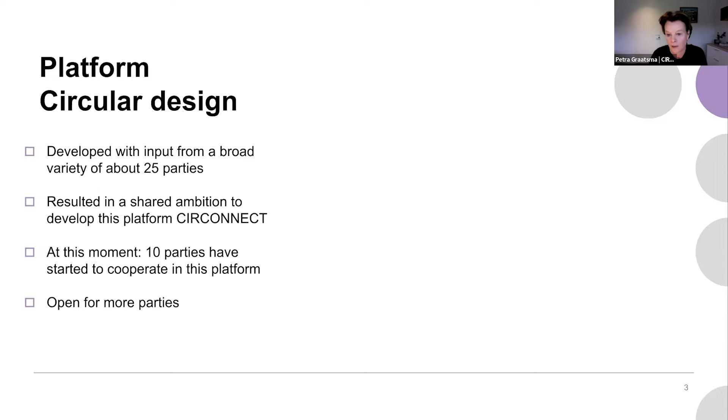What's the ambition of this platform? It's a network of collaborating parties who do everything to collect, contribute, enrich, and distribute their knowledge of circular design, so that companies and designers can apply this knowledge, and that other parties are fed with insights which they can translate into improved system conditions, because this will accelerate the transition to the circular economy.

About today's session - this is exactly an activity that we want to organize from this platform, where 3 different elements come together: the knowledge, the network, and what we call applying. This means you can put it into practice, or it prompts action on the knowledge that is shared.

This brings me to the subject of today. We have chosen a very specific and relevant design topic: the ease of disassembly. We see recently more and more interest and attention for this subject, because of upcoming regulation, customer requests - for example the repair cafes - and circular ambitions of companies.

What's the program of today? We will start the session with Bas Flipsen from TU Delft. He's an expert in this field and will show 2 different tools to assess this ease of disassembly. Maybe you even recognize him later on, because he was on Dutch television last week in Nieuwsuur about repairability.

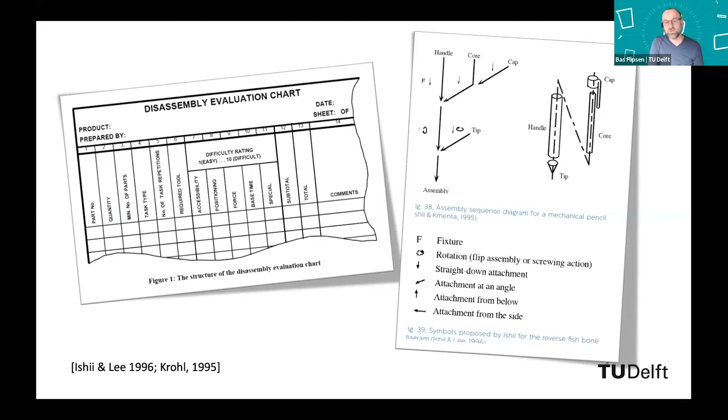But recently, this work has come under renewed scrutiny because of the Green Deal and the commitment of the EU Commission promoting circular economy. Recent material efficiency standards like the EN 4555X series focus on general methods to assess products on all technical loops of the circular economy. The latest addition to this standard is the EN 45554 standard, which promotes a general method for assessing the ability to repair, reuse and upgrade energy-related products. It finalizes the series of standards, and it's a good thing, I think.

In this standard, the identification and ranking of so-called priority parts is the first step in assessing a product on its repair, reuse and upgrade. A priority part is determined by the likelihood for replacement or upgrade, second the suitability of the part for reuse, and the functionality of the part. The standard touches on the most inner loops of the circular economy scheme.

On the other hand, we have the EN 45555 standard, which promotes recovering materials for recycling purposes and focuses on recyclability and recoverability rate and the efficiency of recycling and recovery processes. It thus touches upon the most outer loop of the circular economy scheme. However, both the EN 45554 and the 45555 do not consider the environmental benefits of avoiding the production of equivalent amounts of primary materials and energy carriers, nor the impacts associated with the end-of-life treatment processes.

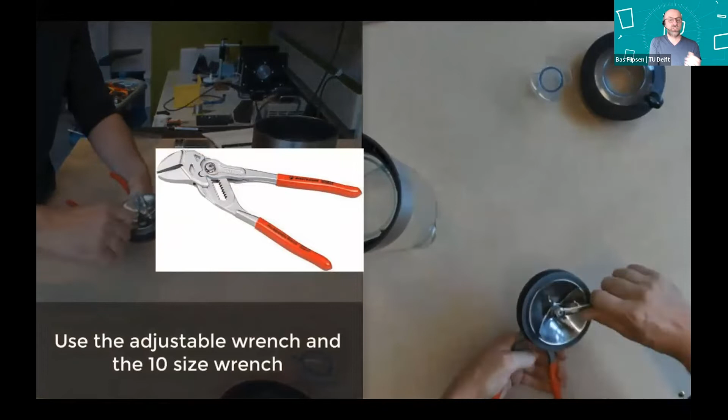The assessment of the product focuses on product-related aspects. Over here you see my blender, which I disassembled completely, and I recorded it on a video.

Not on context-related aspects, such as the availability of spare parts or health and safety risks - we don't focus on that. That's for other concerns like the new EU regulations on repairability and the new repairability scoring, which will come up in this or next years. Or the French repairability index, which also focuses on, for instance, the availability of spare parts and manuals, availability of service manuals or maintenance manuals.

We only focus on the ease of disassembly. So the method consists of 3 steps.

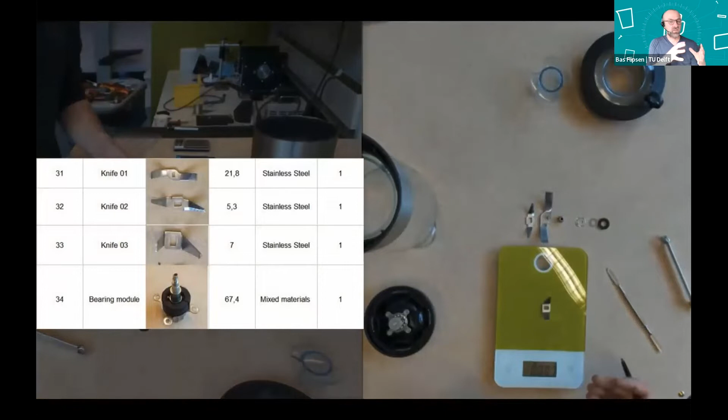Recording of the teardown operation in a spreadsheet - so actually fill in every step you take by disconnecting. You disconnect every part from the assembly and fill out the spreadsheet with a large amount of information, followed by the hotspot identification based on the previously defined indicators.

The third step consists of locating the hotspots in the product architecture by making a disassembly sketch or a disassembly map, and figuring out how deep critical parts are nested in the product and what hurdles have to be overcome to reach them. The last step is not discussed in this presentation.

While disassembling the product, the operator logs the necessary data consisting of 5 properties: the general properties, describing all activities, tools, and actual time involved; the difficulty of access, consisting of the force involved and difficulty of positioning the tool; descriptions of the activities, and of course the general properties - the parts or assembly name.

So that's really important - you have to name the different parts. The fourth group consists of functional sensitivity properties and concerns the failure rate, the amount of maintenance, and the prioritization of the functionality. This is quite difficult to get, but this is the research you need to do if you want to do this assessment.

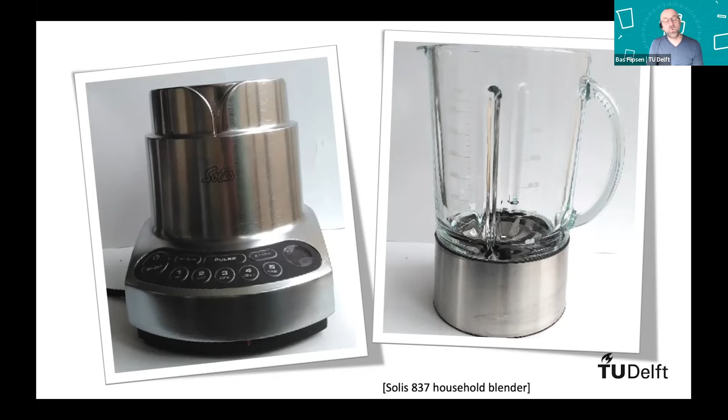The product consists of 39 parts, for which 55 disassembly operations were needed, and 6 different tools were needed in 12 operations. So that's quite a lot.

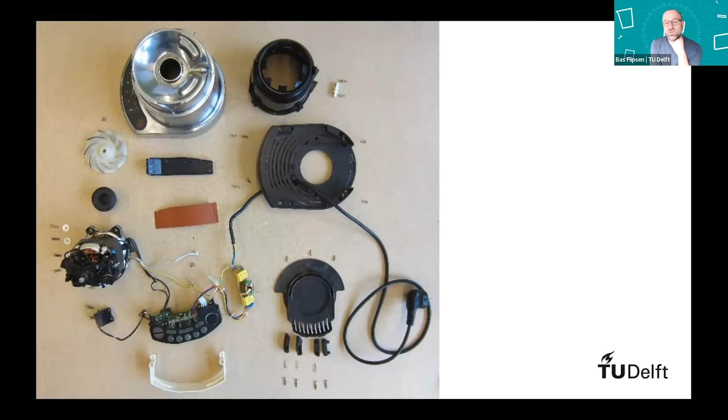High repairable products often have a low amount of tools, or maybe no tools, just your bare hands. In all other operations, the hands were used, and the time required for disassembling was critical for more than one part. So let's see what we have over here.

Especially step 11 and 13 took a while to disconnect, and this is the bearing module, which you see over here. All operations were relatively easy, but only to take out this bearing module, which connects the bottom motor assembly with the top can assembly, took a while, and it was really difficult to reach.

And this actually failed. The rubber sleeve, which you see surrounding the bearing module, deteriorated because of the high acids of the oranges I use in my blender, and it dripped through to the motor, and the rubber actually deteriorated a lot.

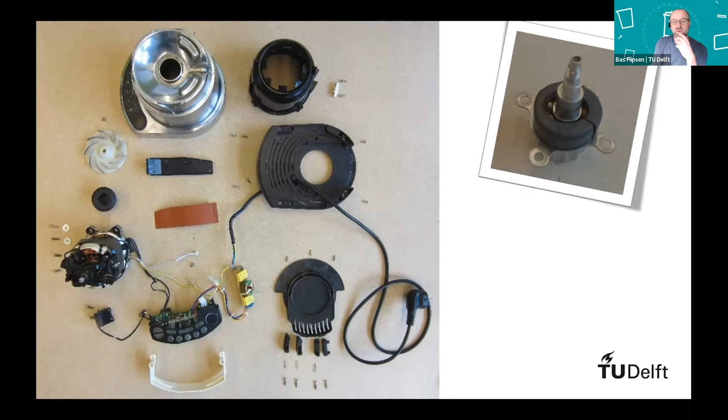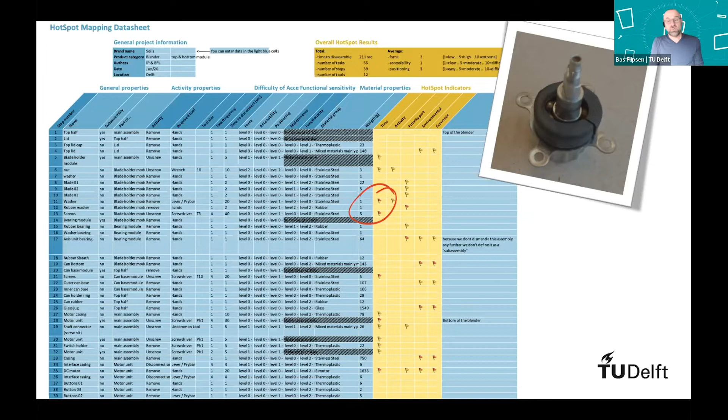Both parts are crucial for functionality and therefore are very important. 3 other parts are red flagged due to the environmental and economic indicators.

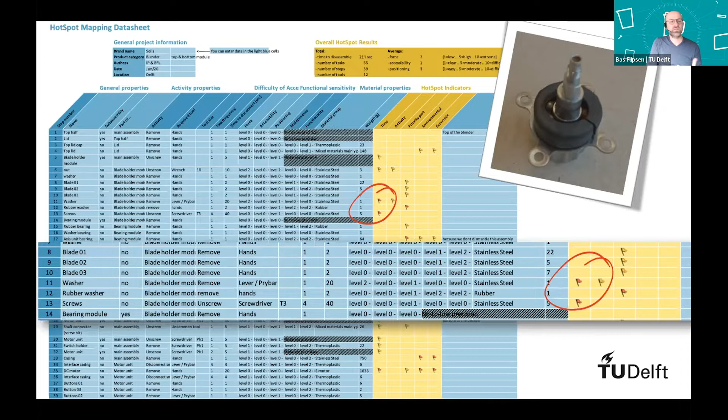Oh, here you see it more precisely. I just added this one - why this is such an important part and how difficult it is to reach this one.

The 3 other parts which are really important are the glass jug, the metal blender case, and the can bottom. And of course you can imagine all types of steels you're using, and stainless steel in this case, and glass, which is being used for the can, it actually absorbs a lot of environmental embodied energy, and it has a high value. So these parts are really important for recycling, but also maybe for repurpose or reuse.

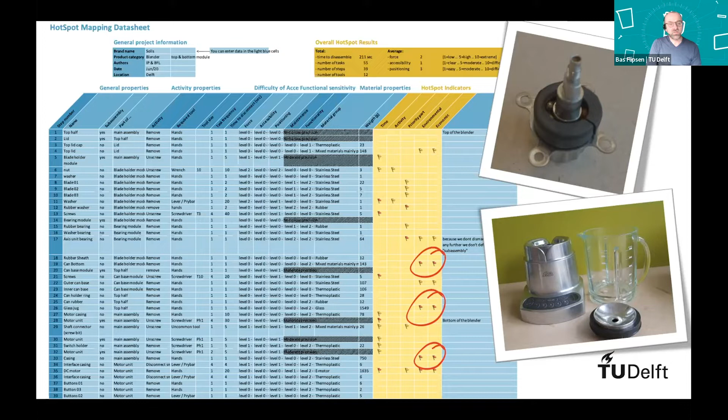This means these parts are worth harvesting in a recycling scheme and thus should be easily accessible. Well, the jug was really easy to take off, and you could take apart the parts very easily. In this case, both these parts are easy to reach.

This is not the case for the DC motor, which is the fourth hotspot part in this disassembly, and it's really important, as can be seen from the hotspot table. The motor has multiple red flags.

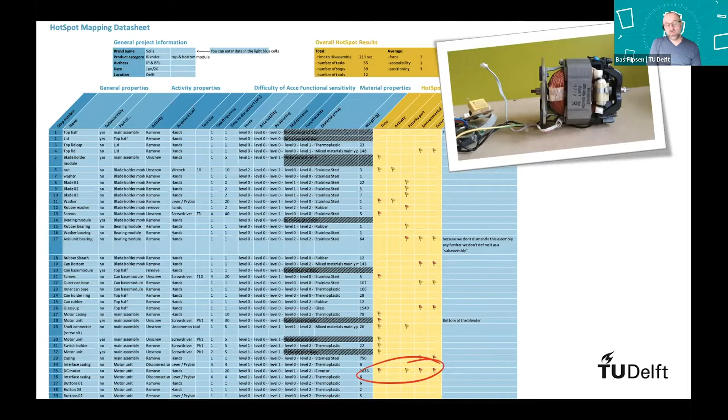This was the main important part. It could fail often, and actually contains a lot of materials which have a high value and high environmental embodied energy - environmental impact, sorry. Because it contains copper and neodymium magnets, it shows up as a priority part in both economic and environmental value indicators.

Besides these value indicators, it also scores high on the time and priority part indicator because of its primary function. Both the value and the priority part indicators show the importance of this part, while the time indicator shows the difficulty of accessing this part.

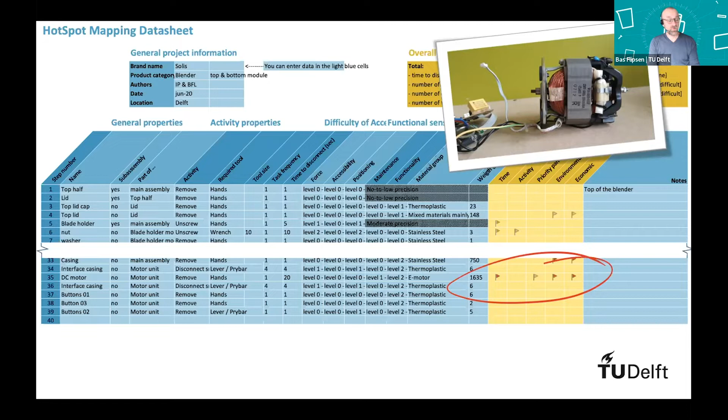It thus shows the hurdle for any reuse or recycling scheme, and there's room for improvement to be found here. So actually accessing the motor is something which we should strive for as designers.

Bas, yes. You have 5 more minutes.

All right, next step is to visualize the disassembly in tree form, like these sticky notes. I call it disassembly sketching. You start out with sticky notes, and you make parallel and series disconnections, like the tree you saw before.

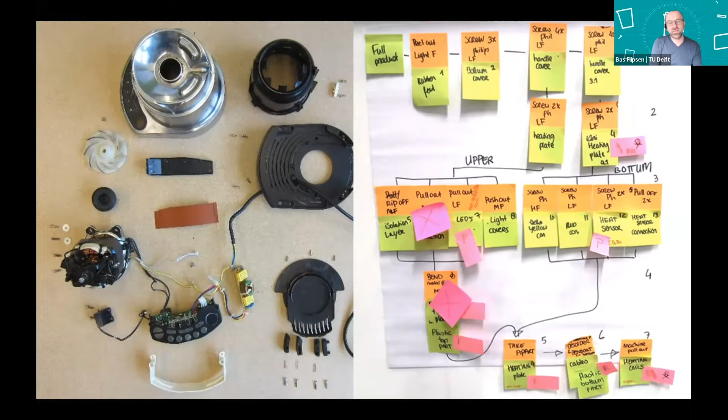This disassembly tree will give you insight into the steps needed to reach a critical component, especially as defined by the hotspot mapping.

You can also make use, as a first sketch, of these sticky notes, which I think is really easy because you can make changes very quickly.

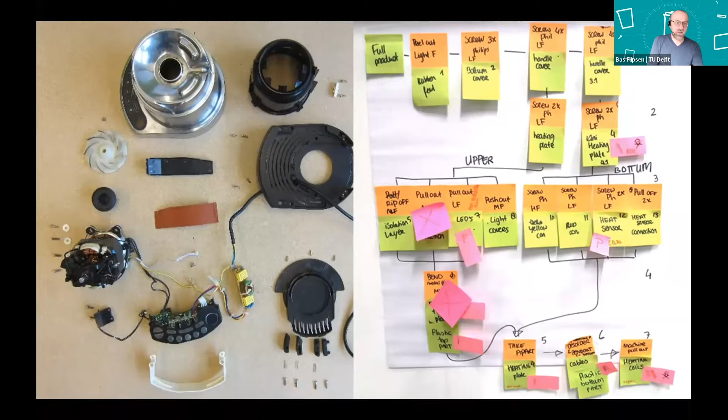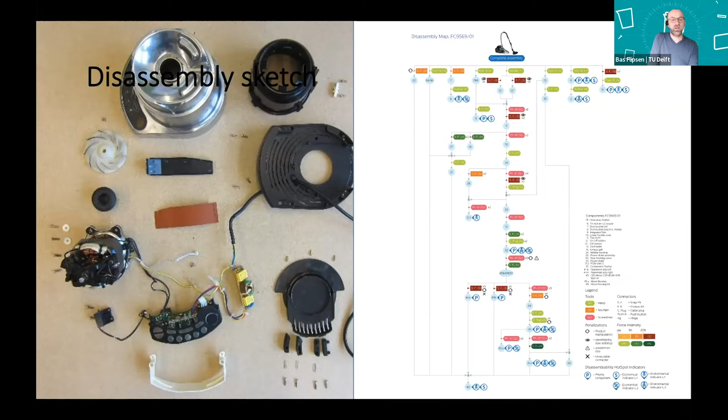Francesco remembers this one. In this map, you can pinpoint these critical parts and the depth at which they're seated in the product architecture. Together with Francesco, we have developed 3 design strategies to improve the ease of disassembly, which is something I can tell you now.

This is best explained by a stack of pancakes, where every pancake is a part, and the number of pancakes refers to how much you have to eat before reaching this very juicy pancake.

The first redesign strategy is surfacing, a technique where we try to decrease the number of steps needed to reach the critical part, in other words, raise the part in the disassembly tree from bottom to top. Ask yourself if there are critical parts which can easily be placed more to the top.

So, accessing the motor by adding, for instance, an easily accessible part which you can take off and take out the motor. You can make use of the disassembly tree to see what the consequences are.

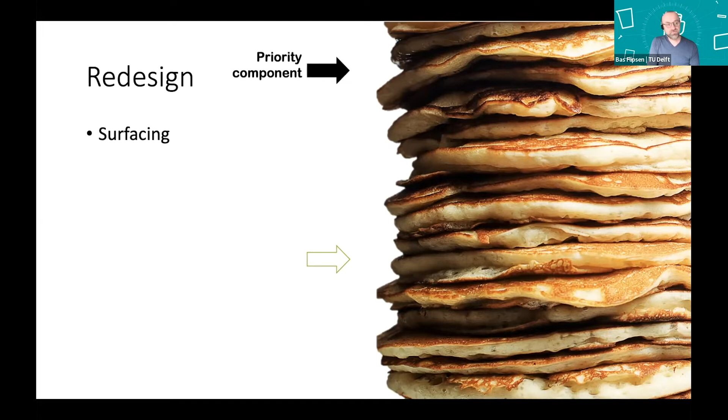The second redesign strategy is clumping, where parts are grouped together and form a sub-assembly. Redesign your product in such a way that the sub-assembly is taken out in one go, freeing up the critical parts which can be liberated in a sequential step. The critical part can be part of the main assembly, but also part of the sub-assembly.

If you want to read more about it, you can read Francesco's report on the repository.

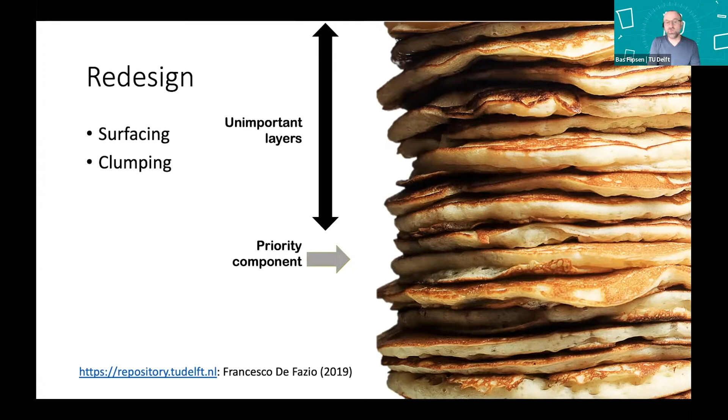The third technique is trimming, which focuses on bringing down the number of and the time needed for critical activities. So actually unscrewing 25 screws and bringing it back to 1 screw is one thing to trim down the amount of time needed to disconnect parts. Rethink the current use of fasteners. That's the goal.

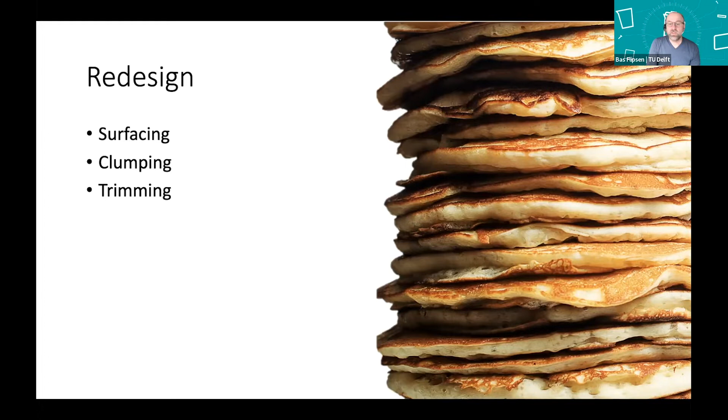Summarizing, hotspot mapping is a method to systematically evaluate a product architecture and identify hotspots in ease of disassembly. It combines a gentle dismantle of a product with the logging of all disassembly operations and part properties involved. Besides priority part identification, it also assesses the product architecture on economic and environmental value of the parts.

I think that's really important, which is not part of the standards or the new European Commission regulations. In this way, it gives designers an improved focus for redesign towards a circular economy instead of only one loop.

Using hotspot and disassembly mapping gives the designer insights into the way the product is built, and by using the 3 presented redesign strategies, in a nutshell, you can improve the product architecture by making critical parts more accessible.

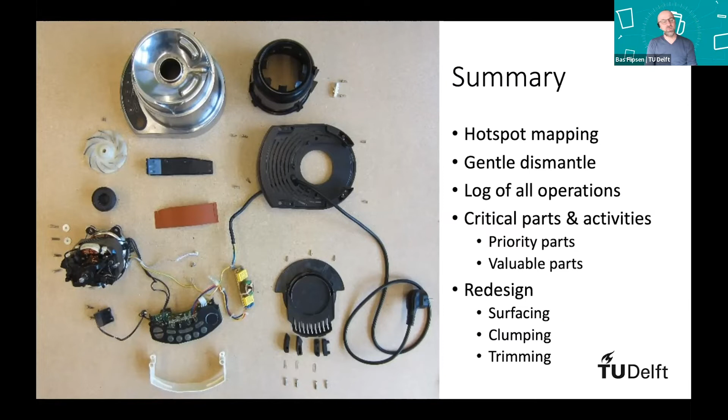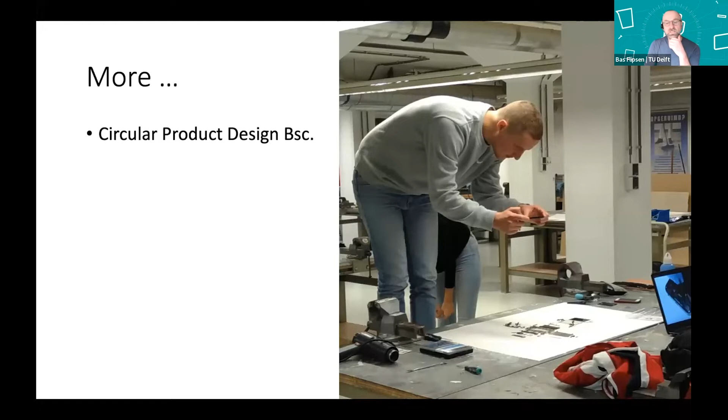Besides developing these tools as scientific output, we try to apply all the learnings and educate people who are interested. The hotspot and disassembly mapping is part of the bachelor course Circular Product Design, and we improve the tools and methods with graduate students working on design for R in the field of, for instance, vacuum cleaners, baby car seats, caravans, and bicycles.

This is often done in cooperation with companies, like in this example, where one of the students, Bente Vermaat, redesigned this baby seat, a safety critical product, to make it a more refurbishable product, which is really rather difficult.

We improve the tools with graduate students.

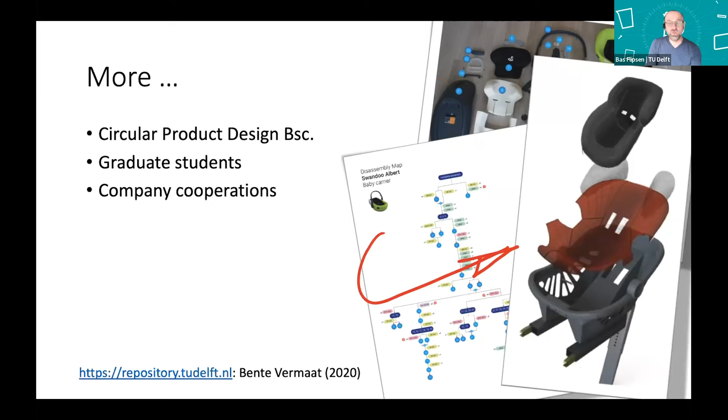Besides students, we try to reach out to the design community and have developed on-campus masterclasses and online MOOCs, like you see over here. You can find more on that on onlinelearning.tudelft.nl. In general, we think we've developed a simple and applicable approach for assessing consumer products on its ease of disassembly and its circular readiness.

This approach is found to be useful for designers to analyze current products on the market and improve their product architecture, making them fit in any of the recovery strategies within the circular economy.

Thank you very much. Was it within the time limit, Petra? No, it wasn't, Bas, but it was very interesting. So thanks for that, and only 2 minutes over time.

So you say it's a simple tool, although you have to do a lot of steps. Is it right that the MOOC is supporting designers to use this tool, or that you also have trainings to use this tool if you want to start with it?

You're on mute, Bas. The MOOC on circular economy does not contain this one. We have a professional education course online, which starts in May, where we actually run through this process over a time period of 5 weeks. Participants, mostly people from the design community, work on that for 4 to 8 hours per week. So that's what the course is about.

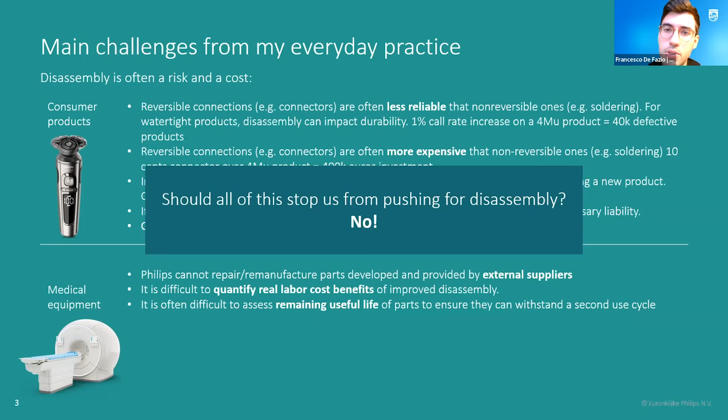So I wanted to briefly show at a high level the process we have been using in the past. It's definitely not the perfect approach—it's something we continuously try to improve over time based on the projects we do, how it works, and the experience we create.

So maybe a few things before diving into that. There are some concepts that are very important to keep in mind before we talk about disassembly. Circularity occurs on two main levels, and they reinforce one another: circular proposition and business model, and circular design readiness. If we don't have a circular business model, there are often no value drivers to design for circularity, and no real business case to do that. Companies are not willing to take that extra cost and risk into account.

At the same time, if we don't have circular design readiness, our circular business models will be inefficient and profitability is low. We saw it in the past where we went full in to create a new business model that is fully or partially circular—the product was not ready for that, and we saw huge inefficiencies there.

Another very important thing to consider from the beginning is that disassembly is not our end goal. We are not doing disassembly for the sake of disassembly—we are doing it because we want to achieve circularity. Disassembly is a design enabler that can enable different circular strategies, like repair, upgrades, refurbishment, and parts recovery. Those strategies are our end goal, and that's what we should define before we start any assessment or study on disassembly.

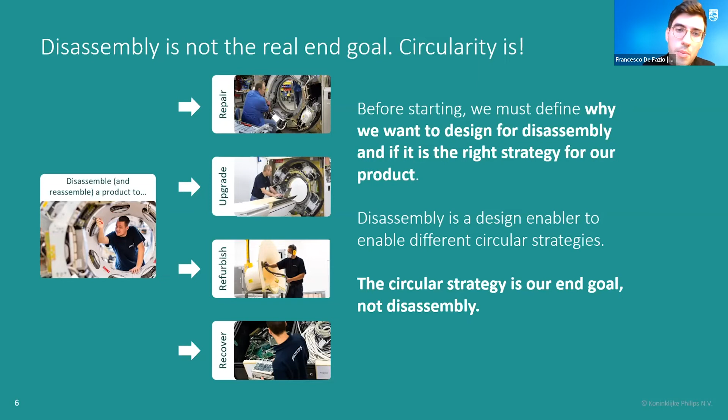Francesco? Yeah. You have four more minutes. Oh, wow. All right, I'm going to try to speed up.

To do that, we defined this high-level, three-level approach. The idea is that the first thing we always try to do is understand what is the most suitable, sustainable strategy for the product and the context we are working in—sustainable strategies that could be more eco-efficiency related, like energy efficiency, or more circular related, like repair.

After identifying the correct sustainable strategy for our specific product, we go to the level of design strategy—what do we have to do at the design level to enable that overall sustainable strategy? Here we find disassembly next to a lot of other strategies that I feel many times we neglect.

At this phase, we do all the assessment work. We use a lot of tools developed also with TU Delft, also what Bas showed earlier, to identify what we call design focus areas—those specific things at the design level that should be improved.

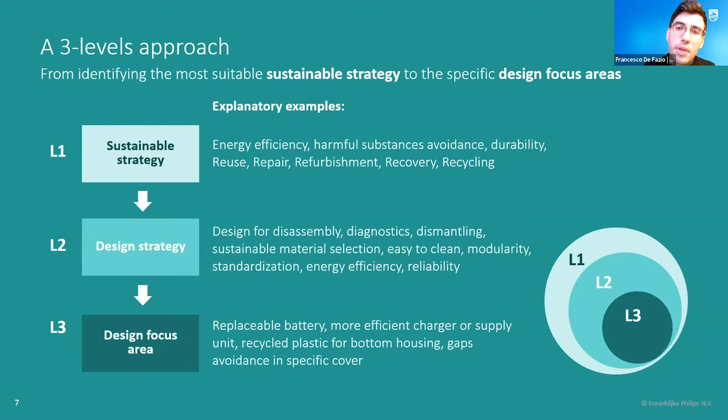How do we identify the most suitable sustainable strategy for a product? We use some methodologies, one of them being product lifecycle mapping. It's very important that we are fully aware of what is currently happening through the product lifecycle, to understand the opportunities and how we can make this lifecycle more circular.

Then we use lifecycle assessment to understand exactly what the hotspots are in the environmental impact of the product. We want to avoid putting a lot of energy and resources into solving something that perhaps doesn't have much impact. We also identify boundary conditions—there are a lot of legal, quality, and safety constraints that have to be taken into account when we define a strategy.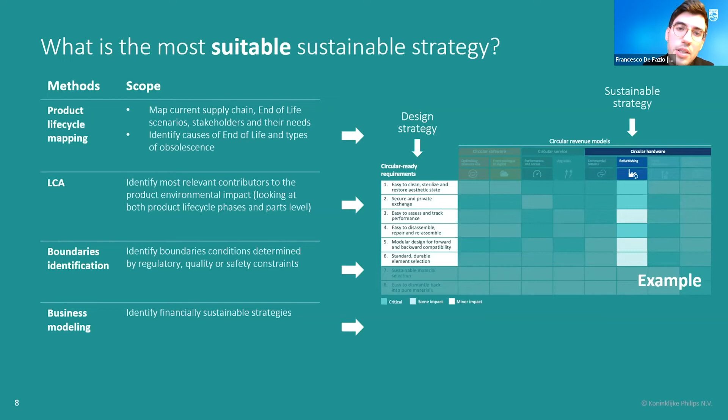We might start designing for repair and then finding out later on that we are not legally allowed to repair a product. Finally, but not least, because it's one of the most important, is business modeling. The most suitable sustainable strategy for a product is also the one that is economically sustainable. It's unthinkable, in my opinion, that a company is going to start going towards a sustainable strategy if it's not profitable, if value cannot be created.

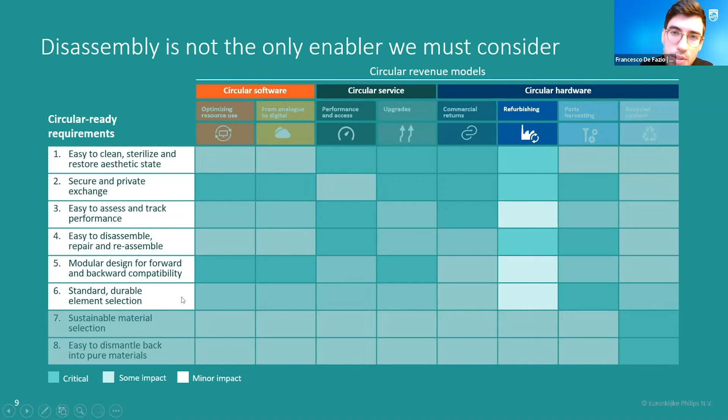Based on that, we identify what we must do at design level. This is a very high level framework that we use in Philips. I really like it because it shows you clearly how circular revenue, the business model part, connects with the design part. Here you see the circular readiness, the design features necessary to enable the different main circular revenue strategies. For instance, if we want to design for refurbishment, these are the things we should take into account. You see disassembly popping up here, but it's next to six other design features that must be considered at the same time.

Another thing we learned, the hard way, is that we really have to bring this up as early as possible in the design process. Here you can see four high-level phases of the overall design process used in Philips, but also in a lot of other companies. I'm really talking about the overall development process, not just the moment where we start doing some sketching, but really the moment where we define what we're trying to do, what is the business proposition we're trying to create.

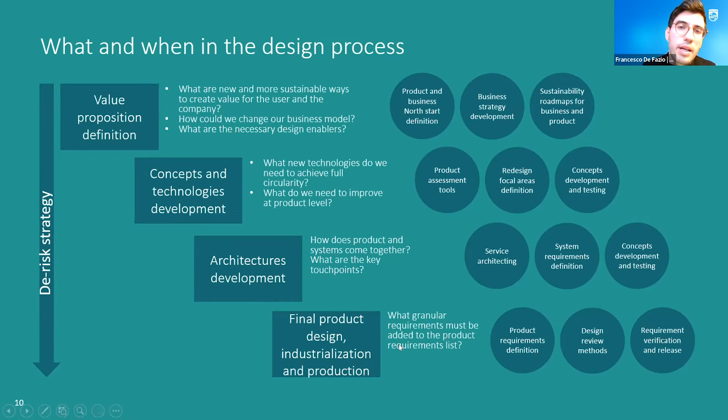This phase is really where we can rethink how to create value for the user and the company in a more sustainable way. How can we change our business model, and what are the necessary design enablers? So we define from the beginning: this is what we want to achieve, and that's why we need disassembly. This is a de-risk strategy. That means that if we present the topic later on in the process, it's going to be very difficult to integrate, because risks are not accepted anymore. We cannot change what has been defined here.

I wanted to give an example of when disassembly works. Good examples are all Philips big imaging systems. These are serviced, upgraded, refurbished, and parts are recovered from them. Why did this work? Because there are clear value drivers for the topic. We have a high value of the equipment. The hospital, our customer in this case, is expecting services and is willing to pay for it. So there is a strong business case. There is a market for refurbishing, and harvesting parts can help avoid last time buy or the scarcity of phased out components. You can imagine that if a product has to last over 15 years, you really start having issues with spare parts availability, and this can really help.

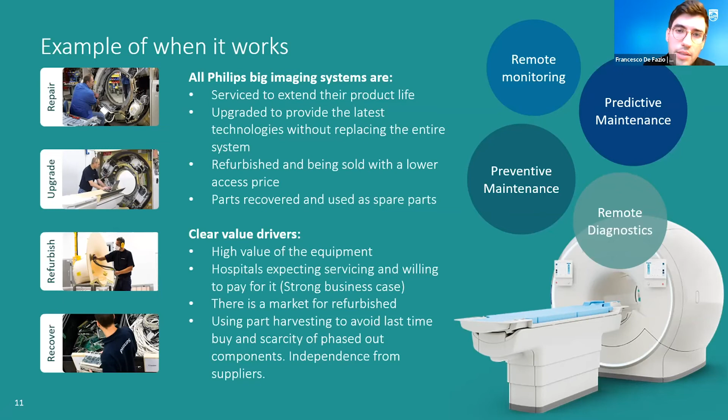And there we start seeing crazy innovation happening—for instance, remote monitoring, remote diagnostic, predictive maintenance, and preventive maintenance. Being able to predict when a part fails before it actually fails, so that we can replace it before it even fails.

If you want to know more about our specific process and tools and methods to design specifically for disassembly, we made a webinar about it called Making Circular Innovation Work. We're going to share the link after this session. There we present in more detail the tools we use in this process, some of which were developed together with TU Delft.

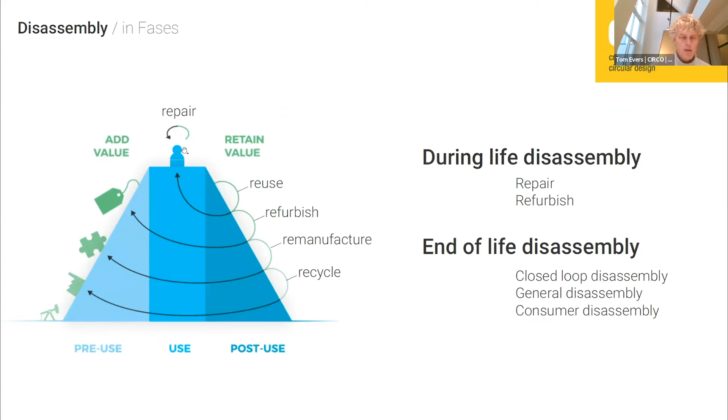First of all, as Francesco also said, it's important that you know what you want to use this disassembly for. You see the value hill for the newcomers to circularity. This is a hill where you can see you start developing your products from raw materials, to industrialized, to components, to retail, to at the end, bought by the consumer. Then it has its highest value, and if you go down and throw the product away, it goes down to zero.

And if we repair products, the value stays the longest. We can reuse it, it stays longer, then it's refurbished, then remanufactured, and recycling is almost the end of it. So it's more interesting, business-wise, to look at repair, reuse, or refurbish than the other options, in terms of the value of a product.

And that's of course what we also try to explain to companies when we do the CIRCO class - it's interesting how you can create business models around these upper topics, not only in the recycle mode.

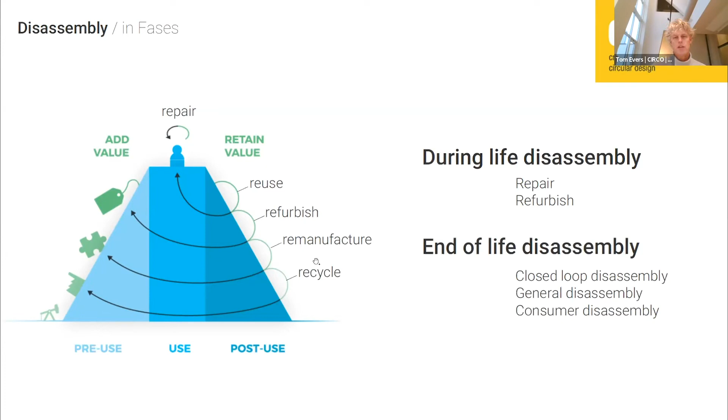But if we want to do a disassembly, it's necessary that we know what we're doing it for. Is it during-life disassembly? Do we want to repair or refurbish? Or is it end-of-life disassembly? I put it into these two, but in fact there's a kind of in-between, like remanufacturing.

And you see also new things coming up - in France they implement repairability scores. You see more services coming up for upgrades, you can also have more upgradable components. You see that the topic of design for disassembly, which we talk about today, is coming in more into the developing process for product design.

We see that spare parts are getting more into circulation, and we see tools of trades coming up, also networks which are more connected, giving more information and access to information - you can see how to disassemble a product via YouTube or whatever platforms there are.

That's what you see from consumers. But the other thing is, if we have consumers, we see also that consumers are quite lazy, and they're not always willing to go very deep into disassembling a full product. So it also has to be something very easy to access and easy to do by consumers, if you want it done by consumers.

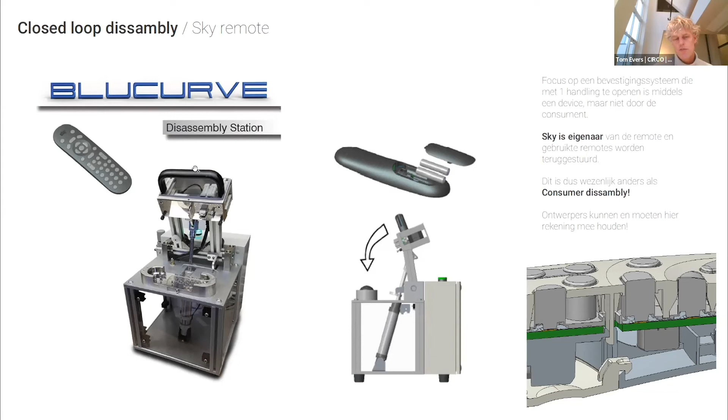So the impact is not only on the product, but it's also on how you're going to use it and how you're going to do it industrialized in your process. And of course, if you do a project like this, that's something completely different than when you do a consumer disassembly.

I made just a proposal, just a quick sketch. One of my designers did it, just to show you that it's not difficult to make a design for disassembly, but it's just a different way of thinking. I would show you this with the office chair.

If we look at an office chair, we see that there are a lot of components which need repair, which will break earlier. So we have the backrest, we have the armrest, we have the seat, we have the gas strut, and we have the casters. Those are the main parts which will have the first type of repair.

If we pick out one, let's say the backrest, we can think about how we want to have this repair. Is this a repair that we want the consumer to do themselves, or is it a repair that gets sent back to the original distributor or producer, who does a kind of refurbish on it? That's something you have to take into account, also how to organize it.

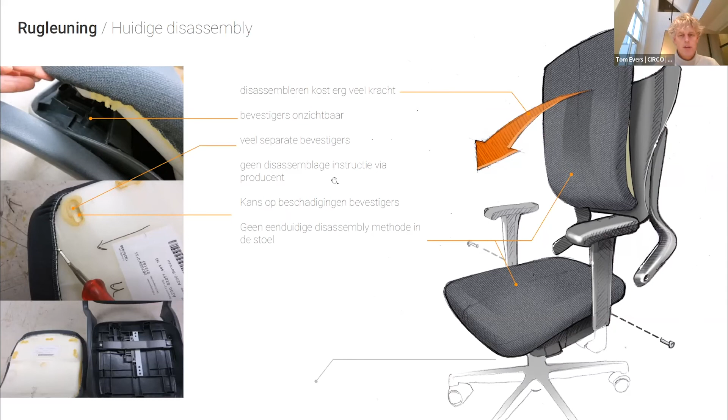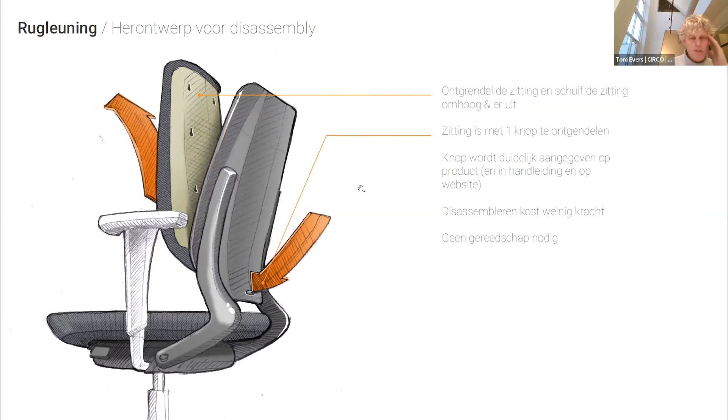But if you look at it and how to solve it, you say, okay, we want to make it easy and accessible for disassembly, then you could easily make something with only one point to disconnect, and then you can shift out your backrest. So it's an option you could do in a very simple way, which doesn't cost more money if you develop it in the right way, and it's easier to access.

And then if you do it like that, it's also interesting for companies like Ahrend or other companies to refurbish their parts and make it accessible for consumers to send it easily to their company, so they can refurbish it and send it back, etc. They have better control about the whole system.

Yeah, this was in a very short session because I had only 10 minutes, and I think I managed to get it in 10 minutes.

So thank you, Tom. It's so good that you have also this perspective, that for a product like a chair, you can maybe have some things, not very easy, but at least some things you can do easily in order to improve the disassembly rate of it.

What I wanted to mention is that you can make it very complex, but sometimes it's also simple. So we just have to start with it and do it, and then you will come quite far. Most products are not made to disassemble, and that's the key.

Yes, and you also gave a value driver, for instance Ahrend, how they can also make business out of it, so there is also a business motivation to do so. Well, many thanks for your elaboration.